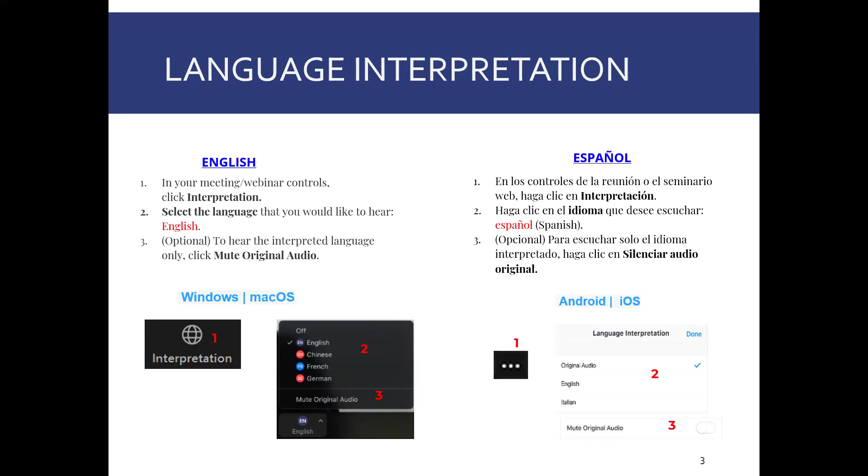We'll go through who's on our webinar, then a site overview, and talk about the proposed cleanup plan and the plans that will be in place to make sure the community is protected during all work. We'll talk about the schedule, and then open it up for the most important part, which is questions and answers and input from the community before we make a decision on the site.

As I said, we're here tonight to discuss the draft cleanup plan for Depot Road in Hayward. We are in the middle of the public comment period on that, and it runs from August 23rd to September 23rd, as you can see by the dates at the bottom of the agenda.

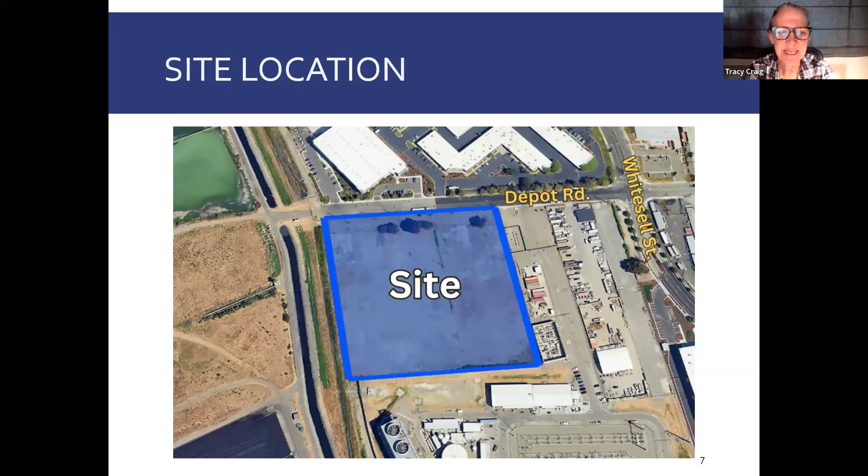Okay, quickly I'd just like to orient you. Here's the site location map. You can see Depot Road, and this again is in Hayward. Now I'd like to turn it over to Noel, who'll go through a short presentation, and then we'll turn it back to me before the question and answer portion.

Thank you, Tracy. So for our audience out here, this slide indicates the location of the site, green and yellow. There are two parcels here, both with a similar history. They were at one point in time agricultural in nature, and then starting in the late 1960s to approximately 2014, primarily used as an automotive salvage yard, and also a former trucking company.

Both of those site histories are explained in great detail in the case record on GeoTracker. Following 2014, after the automotive salvage and repair yards had left the sites, they became concrete recycling, pallet, and cardboard recycling operations. They're currently vacant.

Prior to today, cleanup has been conducted on the site, consisting of removal. This was at the time the automotive salvage and repair yard had left all of this waste oil: 15,276 gallons of waste oil, nearly 21,000 tires, millions of pounds of scrap iron, over 1,000 lead acid batteries, and what the case record documents as quote unquote solid waste was removed from this site. So prior to that, it had been a pretty dirty set of operations, but a lot of cleanup had happened.

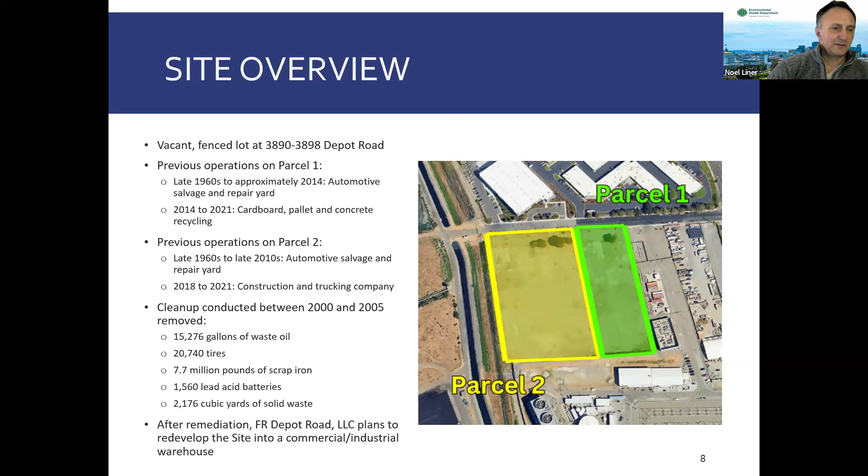There are still some residual impacts, limited in nature, and those will be remediated. That is what this cleanup is about. So if we can go to the next slide.

There have been multiple investigations beginning from 2001 to today, and essentially the most recent investigations are the data we are relying on the most. The contaminants of concern that have been delineated in soil contain lead, lower levels of petroleum hydrocarbons, some arsenic, and a very limited area of low levels of PCBs.

Groundwater historically has had some metals and low levels of petroleum hydrocarbons and MTBE, which seems to be ubiquitous given the nature of the area and surrounding site uses that have similar histories. There have also been chlorinated volatile compounds detected in soil vapor, some methane, some petroleum hydrocarbons at varying but fairly benign levels in general, and those will be addressed in a separate vapor intrusion site conceptual model.

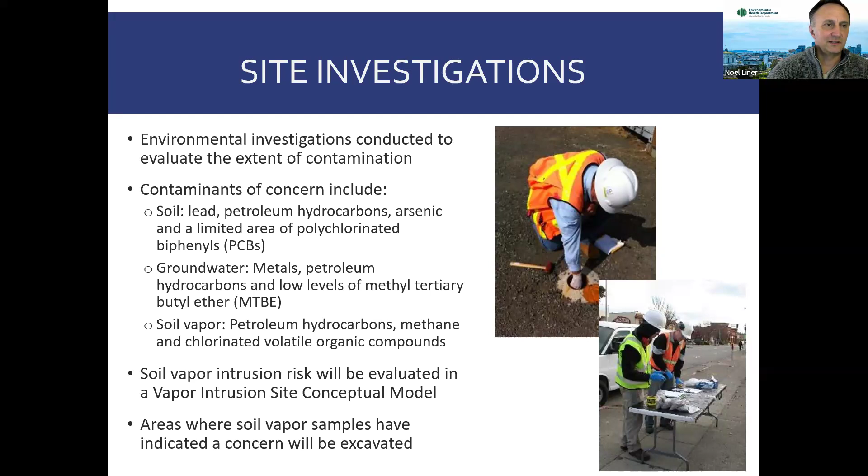This particular site cleanup that is being proposed is for soil, and it will remove the lead, the petroleum hydrocarbons, arsenic, and the limited area of PCBs. So let's go to the next slide.

This slide is simply showing the locations of samples that have been collected over the course of site investigations. The colored ones are the recent site investigations from the last couple of years. They appear in this pattern and these colors because they represent step-out samples where we delineated the extents of impacts, requiring multiple iterations of investigation to get to the edge of what we think are the extents.

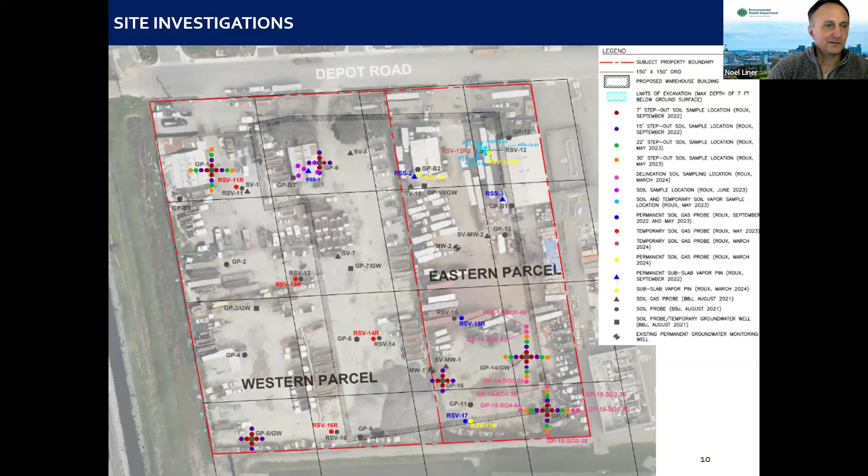If you go to the next slide, you can see that these approximate excavation areas overlap with some of those locations on the former slide. That shows where the boundaries are going to be.

Vertically, impacts have been delineated in shallow soil to about 3 feet. They've been delineated below that, but essentially lead and other contaminants are within the upper 3 feet here, so it is very shallow excavation that will be performed around the site.

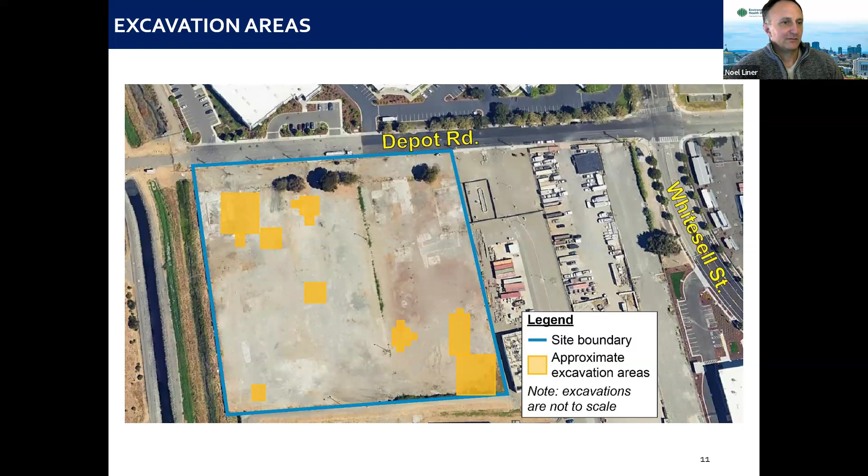In the lower right-hand corner of the slide, this unusually shaped excavation on the bottom, there will be some step-out samples collected for purposes of doing a little bit of additional delineation for lead. We can move to the next slide.

Currently, we're projecting approximately 2,860 cubic yards of soil will be removed from the site. There will be one portion of excavation up to 5 feet, but generally 2 to 3 feet. Soil samples will be collected to confirm that the contamination has been removed. If it hasn't, the excavation will extend and additional soil samples will be collected.

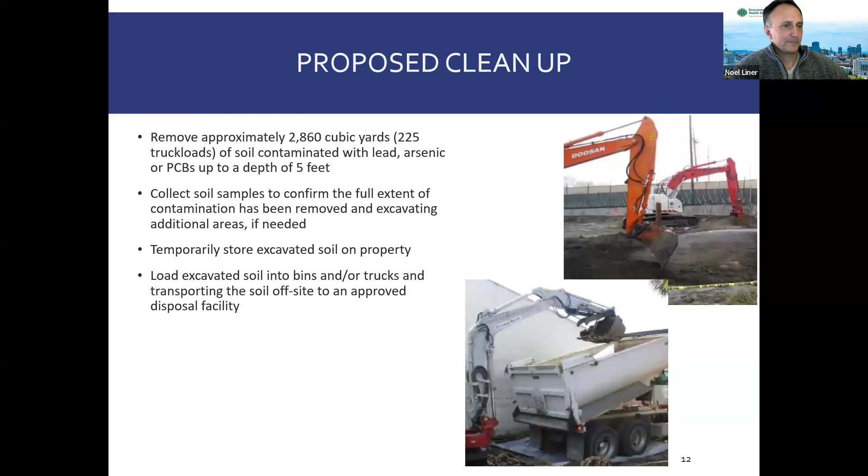That soil will be temporarily stored on the property, and then it will be loaded into trucks for transportation to an off-site disposal facility. Go to the next slide, thanks.

During this excavation work, perimeter air monitoring will be required. That will consist of up and downwind dust monitoring stations and portable air monitors, as well as equipment for monitoring wind direction and speed. Those dust monitoring stations will house dust monitors that take continuous measurements, which will be averaged throughout the day to verify that action levels are in conformance with Bay Area Air Quality Management District regulations.

That's 50 micrograms per cubic meter over a 24-hour period. If any of those action levels are exceeded or reached, then the work will stop and additional controls will be put in place.

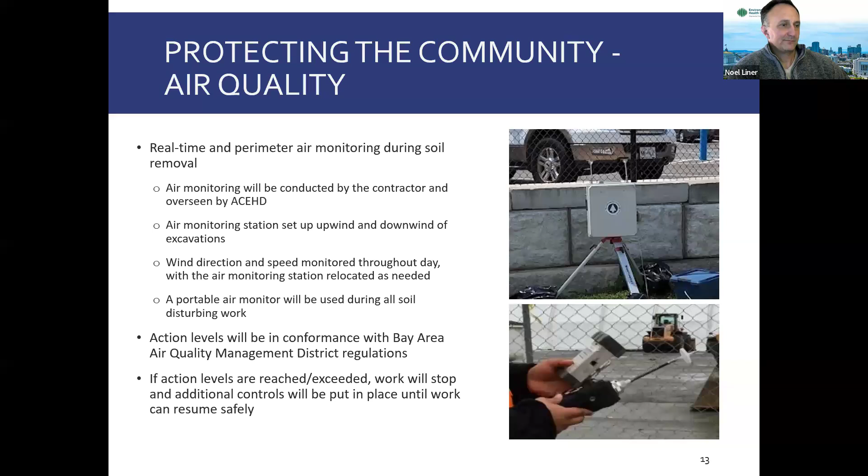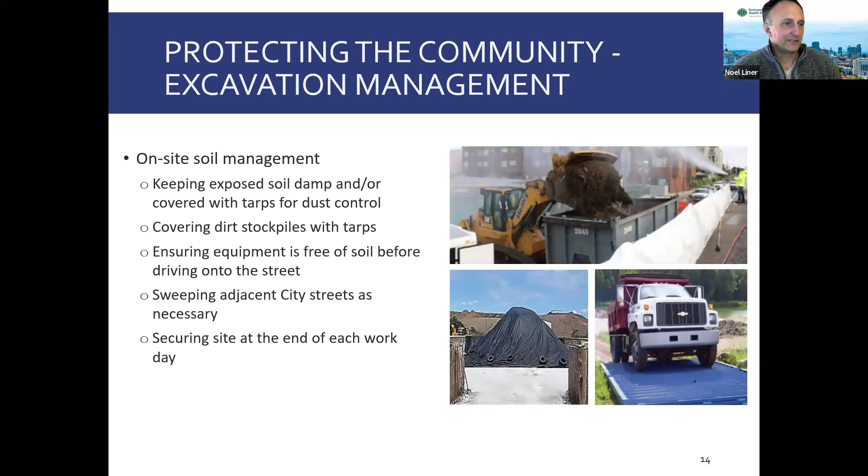Current projections are about 1 month to remove the soil. That would be about 10 to 20 trucks per day.

There is the next slide, which will show the traffic plan for the route of the trucks. It is primarily through commercial spaces and industrial spaces, so any travel will be minimized through residential streets to the extent practicable, and you don't expect there will be any really. Trucks could be staged on the site or perhaps outside along Depot Road, again in the commercial area.

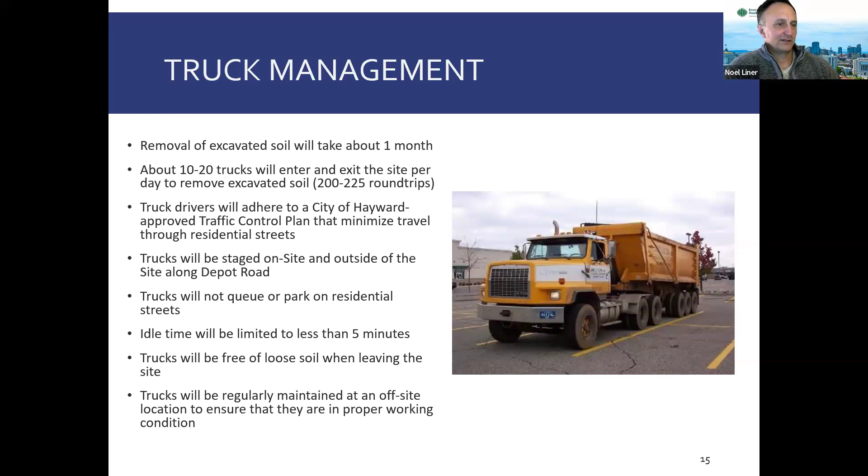So impacts to residential receptors are not expected. Trucks are not going to be parking on residential streets. Idle time will be dictated by the Bay Area Air Quality Management District regulations of less than 5 minutes. And again, as they leave the site, loose soil will be removed from the trucks. They will all be maintained regularly at an off-site location to ensure they're in proper working order.

This is a truck route map. Site indicated by a star on the upper left-hand side. Goes through industrial and commercial areas, with a short little bit of boundary between those areas and residential, but primarily to commercial locations. So it's a straight shot to the highway and then off to the disposal facility.

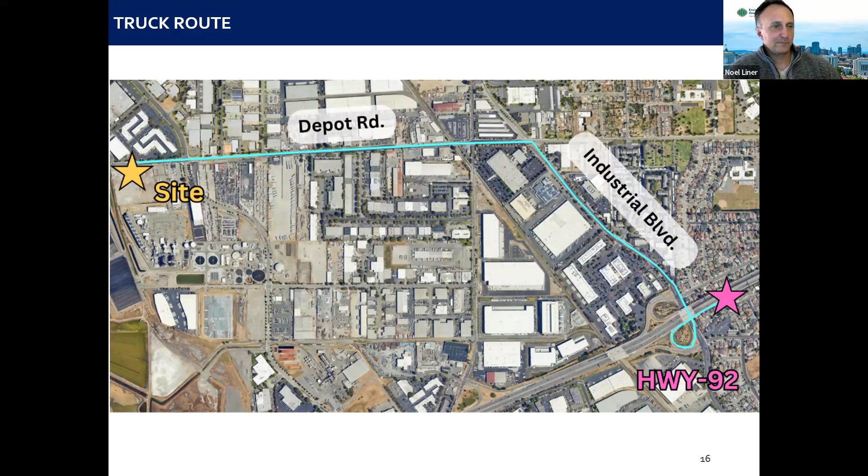It's important for people to know what they can expect during this work. This work will last about a month. There'll be a crew of about 24 individuals on site. This is heavy construction work, so you'll see big yellow equipment.

The working hours are 7 a.m. to 7 p.m. There will be site signage, and on that sign we'll have my name and my number. It's also right here, Tracy Craig, 510-334-4866. That's my cell phone. If neighbors or people walking by have any questions or concern, they're welcome to call me or text me at any time, and I'll work with the on-site crew to address those.

And this is our schedule. Right now we're in the middle of the public comment period, which will end September 23rd. Alameda County will issue what's called a response to comments document that will respond to any comments we received, and will show how they were considered in making a final decision about the corrective action plan for the site. We anticipate that will be done in the September-October timeframe.

A work notice will go out to the community 5 days before the work starts so that people can prepare themselves for that month of work. Actual soil excavation will last about a month, and that will be conducted in late October or November. Communications are ongoing, and as with any schedule, this one is subject to change based on weather or permitting conditions.

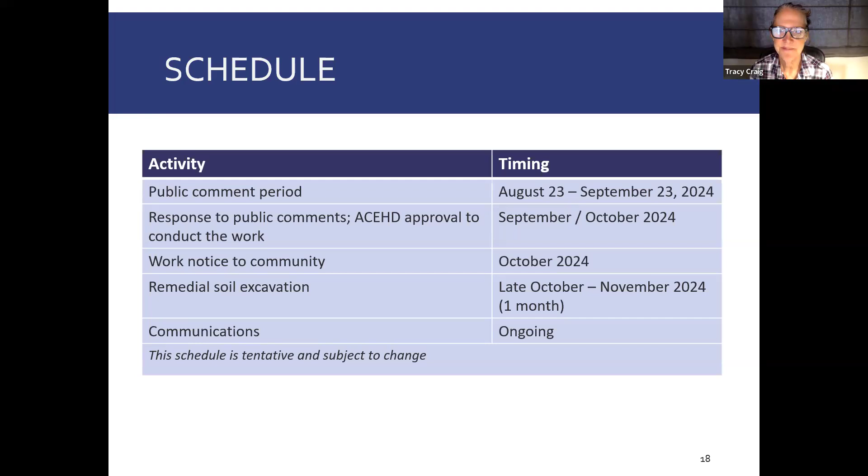And finally, the most important part, how to provide public comments. People can provide public comments at tonight's meeting. They can also email them to me at tracy@craig-communications.com. Call me or text me with questions. And the documents themselves, if you're so inclined to look at them, are available on the Water Board's website.

And that's the first piece of information. John, can you just highlight that, where it says GeoTracker Water Board? So all you have to do is go there, put in the search engine 3890-3898 Depot Road, Hayward, and all of the documents will pop up.